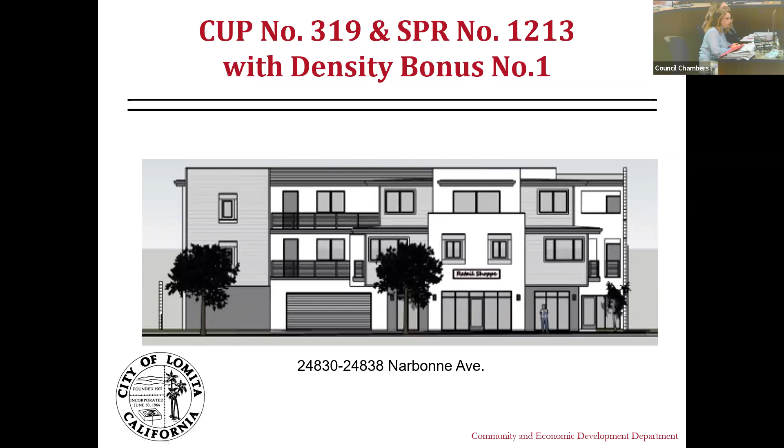Good evening, Commission. Good evening, public. Before the Commission tonight is a conditional use permit and a site plan review application for a 3-story, approximately 20,000 square feet mixed-use building that has also sought a density bonus and will be providing one very low-income affordable housing unit. Next slide, please.

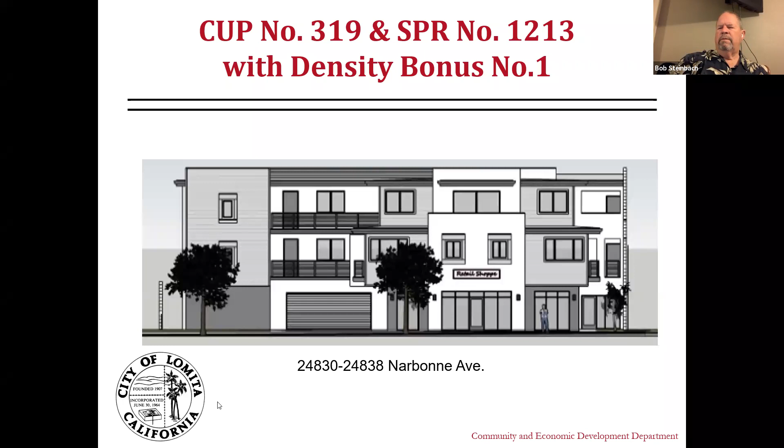The site is located on the easterly side of Narbonne Avenue. The lot has a depth of 132 feet and a width of 100. Narbonne Avenue is an 80-foot right-of-way that has 2 through lanes, a bike lane, street parking, a parkway, and a sidewalk. All right-of-way dedications have been made. This property is one lot north of a signalized intersection at 250th Street.

To the east of the subject site are 2 residential properties. To the west is medical offices and personal service uses. To the south is residential and commercial property at the corner, and to the north is the Kiwanis Club, considered an assembly use. Also on the Kiwanis property, there's a driveway apron on the southerly side, along the shared property line. Next slide, please.

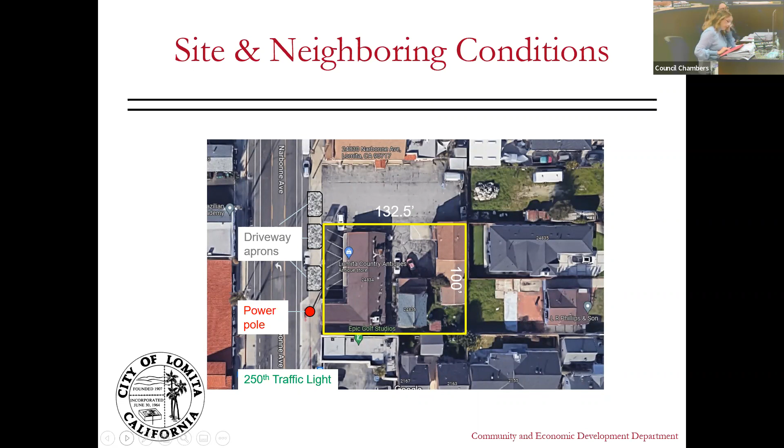Mixed use is allowed with a CUP in the zoning district, in the CG zone, and there's a mixed use overlay. The general plan designation for the site is mixed use, which allows for commercial and residential, with the residential density being 22 units an acre. The maximum floor area ratio is 2 to 1. This project has a floor area ratio of 1.56. Next slide, please.

So this presentation, I'm going to walk through the site plan and also interweave the aspects of the conditional use permit. We'll start with the ground floor of the project and the front portion, because there are lots of components going on here. This site plan contains all foreseeable features that will have a footprint, and thus it accurately represents the future as-built conditions.

As we can see, I've tried to distinguish each of the components on this front portion. First, the property's landscaping has met the requirements. It's providing its 2 frontage trees, and it will have a landscape bed along the parking area that's 7 feet, where the minimum is 5. We've also looked out for the sight line on the property, coming from the driveway.

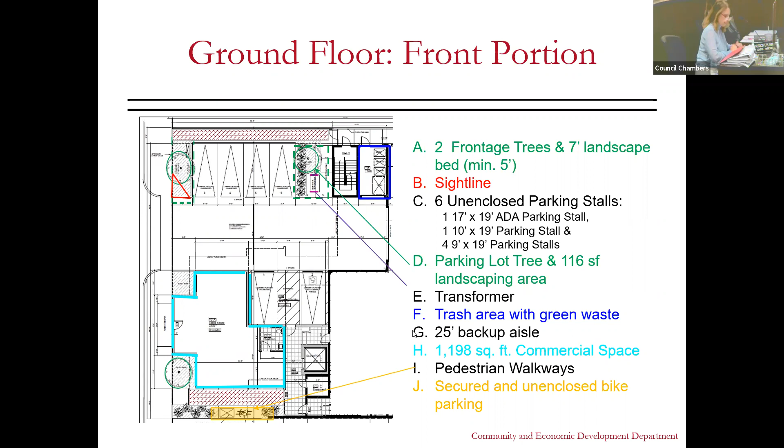So here is the rear portion of the property. Starting at the top, there is a gate and a pedestrian walkway, so the garage to the residential area is secure.

The utility meters for your gas and electric panel are recessed and not visible from the public right-of-way or from the adjacent property, because there will be a wall screening them from view. There's a 10-foot rear yard landscaped area between the residential properties and this project.

The residential garage is common. There are 11 spaces in here. They all meet the minimum dimensions, which again includes 1 for ADA, required by building code. We have 6 that are 10 feet wide because they're up against a wall.

I wish we could see that portion of it. There's again a 25-foot wide backup aisle, which is a 2-way aisle. It ensures sufficient space for maneuverability, meaning it can be used by a large variety of vehicles. Number 7 shows that you have to have, on a 1-way aisle, or where the aisle dead ends, 10 feet so the vehicle can back up.

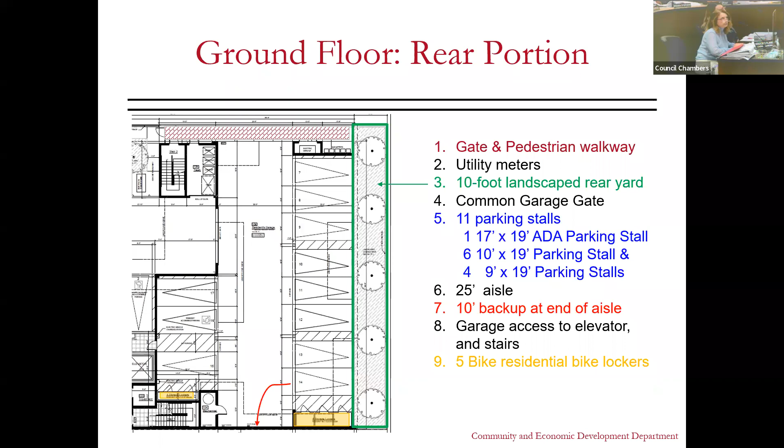This is the proposed second floor. There are 3 one-bedroom units on this floor, and the rest, of 8 units. What is good about that is we need a mix. There are all types of households and all arrangements of living, so people who want to live by themselves or couples can certainly find opportunity in Lomita.

The very low income unit will be a 2-bedroom unit. They have to provide what is the preponderance of the units, and that is one of the 8 2-bedrooms. The open space area, as shown on the plans, has both private and common space. The common area exceeds the minimum standards and is on the 2nd floor.

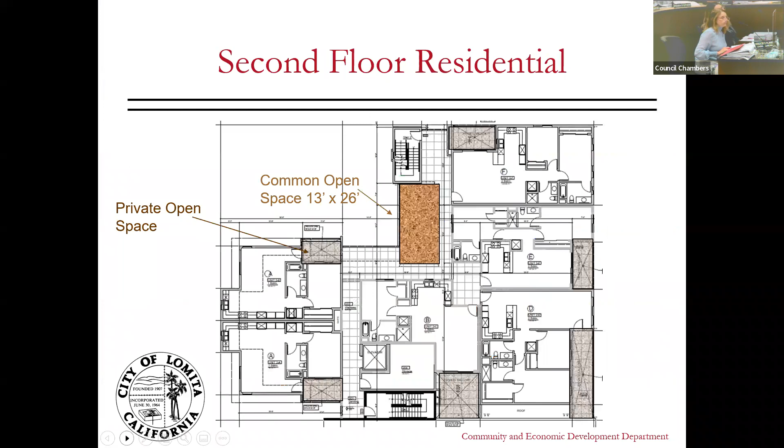The 3rd floor consists of the 5 two-bedroom apartments, again showing that they each have some of their own private open space, and combined this project exceeds the required open space.

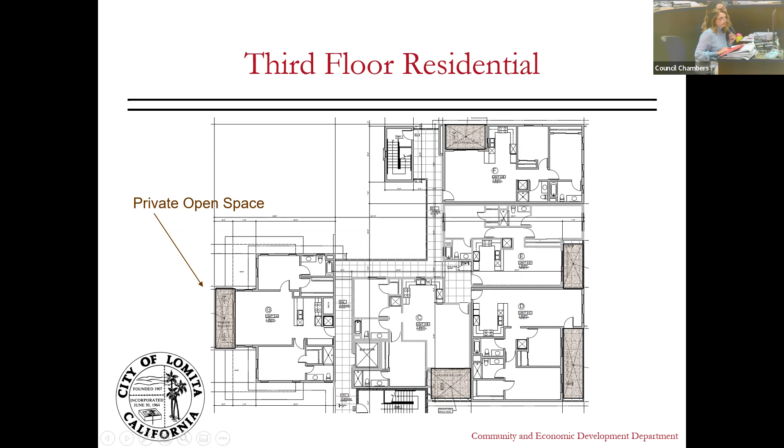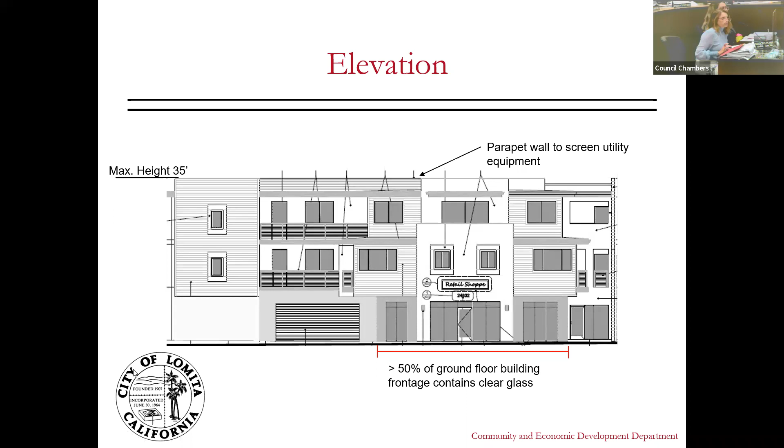This project applied for a density bonus, and we're discussing this only because the density bonus is interwoven into the project's application. It is an administratively reviewed application, and we've talked about density bonus, but I want to review how we got to the number of units.

The general plan for this area has a density of 22 units per acre. Under the density bonus law, there's kind of a progressive scale, and based on the percentage of units and the type of units, meaning whether it's low or very low, the state law, which is included in your packet—you don't need to reference this now, but I'll let you know it is subsection E that has the percentage breakdowns.

And so for a project that has this, this project would be entitled to 4 extra units, and we do round up when it comes to the density bonus calculations. That is a component of state law. So they go from 7 units plus the 4, and that is how we reach 11. This comes to 36 units an acre, but it is consistent because we're using the base density of 22 units, and we adhered to the state law.

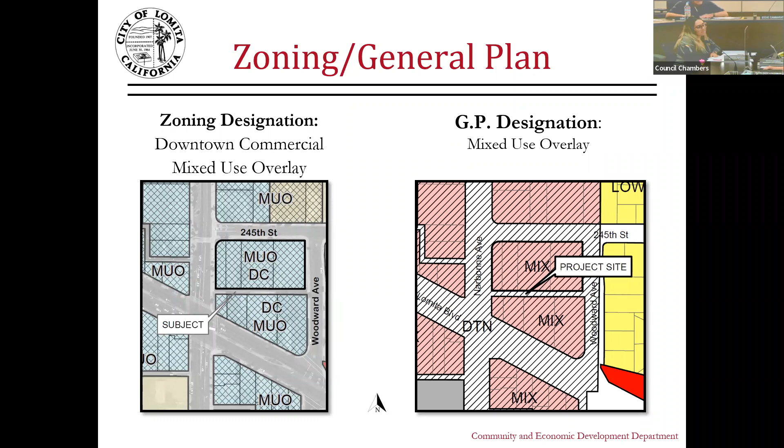It is approximately 15 feet in width and 190 feet in length.

As part of the phase 2 portion of the project, the applicant proposes to vacate a portion of the public right-of-way to create a public paseo connecting the commercial portion of the project facing Narbonne Avenue with the phase 2 residential units in the rear. As conditions of approval, City Council required a purchase and sale agreement as well as other conditions to ensure the proposed vacation has a formal conversion to private property.

On December 22nd, 2021, City Council declared its intent to vacate the subject site and directed the Planning Commission to conduct a hearing on the matter.

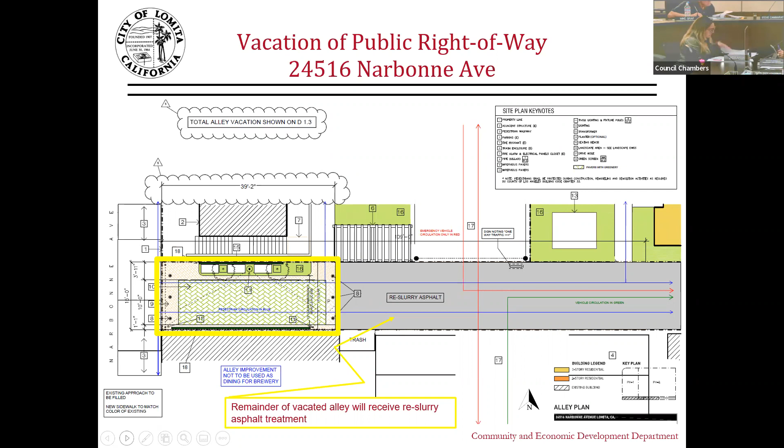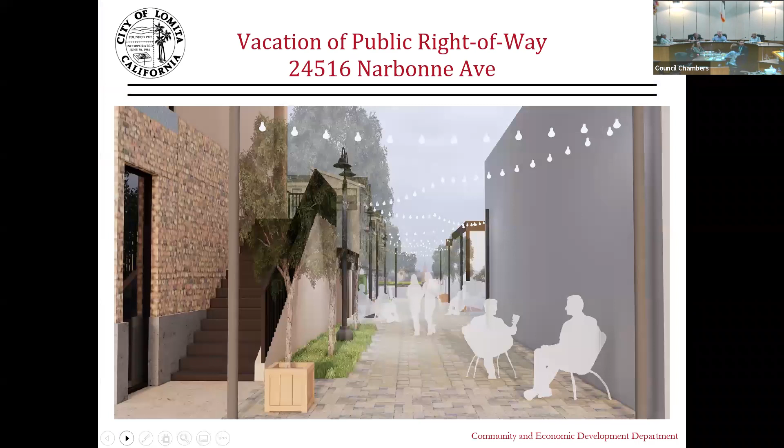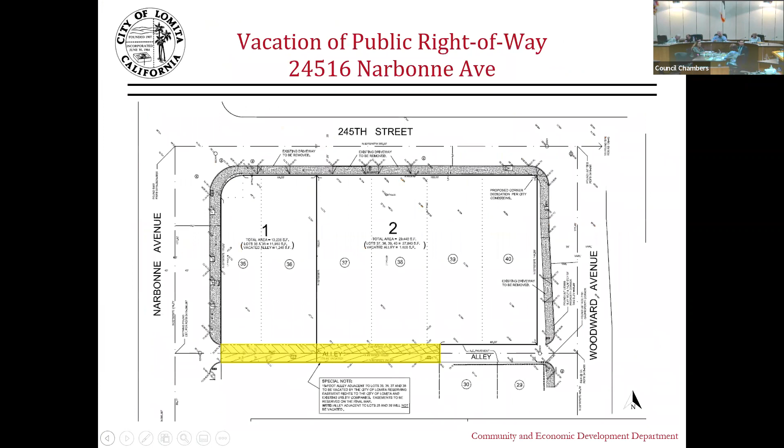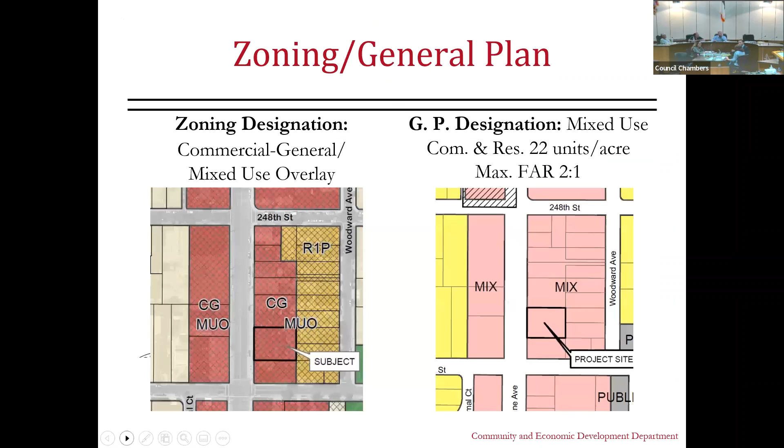I apologize, I hope you can hear me. My mouse keeps getting stuck, and when I click back onto the presentation, once I finally find my mouse, it sends me back to the beginning. I'm going to have to test something.